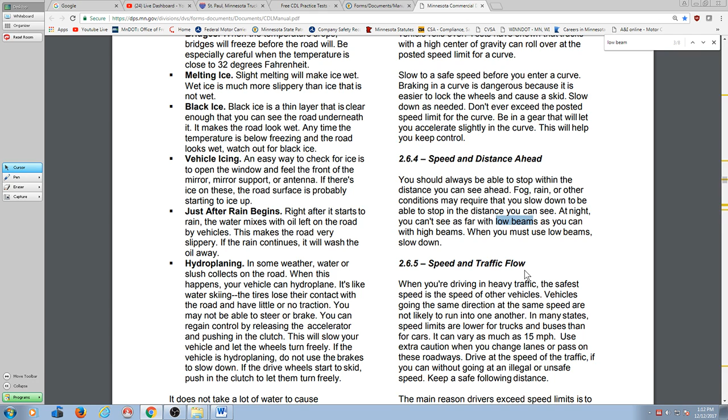So let's type in low beam. What it's going to do is take me to every place in the manual, and apparently there are 8 places in the manual that low beam is mentioned. Now, it doesn't take me to the word low or the word beam, it takes me only to low beam. So I like that, because typical search engines, you type a phrase in and it'll take you to every variation of it. So I really like the way they've got this structured.

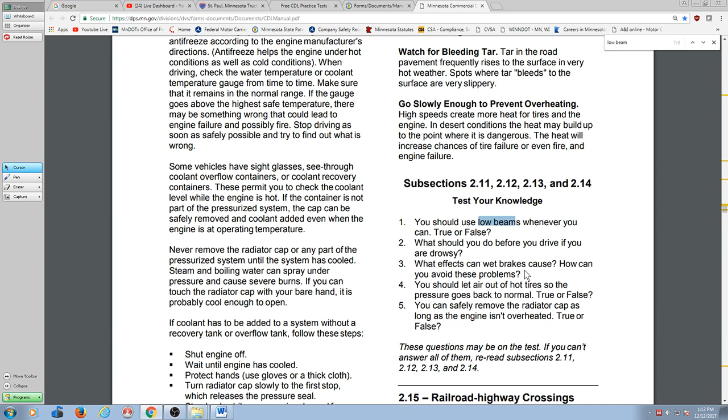This is very helpful to me to be able to answer or find information in here. I can't tell you how many times I'll have read something and think, wait a minute, what was that? I just read that a few minutes ago. Where is it? Now I'm searching trying to figure out where this thing I'm looking for is, and this just helps me find things so quickly. So I really like that. Go to section.

You have to spell properly, though, when you do this. That's the only kicker of it. Come on, you can do it.

All right, so now something else I want to show you. If we go back to my handout here, item number 6, the manual is also available as an audio file. Let's go back to the website. Instead of clicking on the manual itself, if I scroll down, you'll see the commercial manual, the regular car manual, and the motorcycle manual also have it available as an audio file. Now, on the screen here, I've got section 10, so let me click on that and watch and listen here for a minute.

Material on page 10-1 omitted. Continuing with the text. Section 10, Pre-Trip Vehicle Inspection Test. This section covers internal inspection and external inspection. During the pre-trip inspection, you must show that the vehicle is safe to drive. You will have to walk around the vehicle and point to or touch each item and explain to the examiner what you are checking and why.

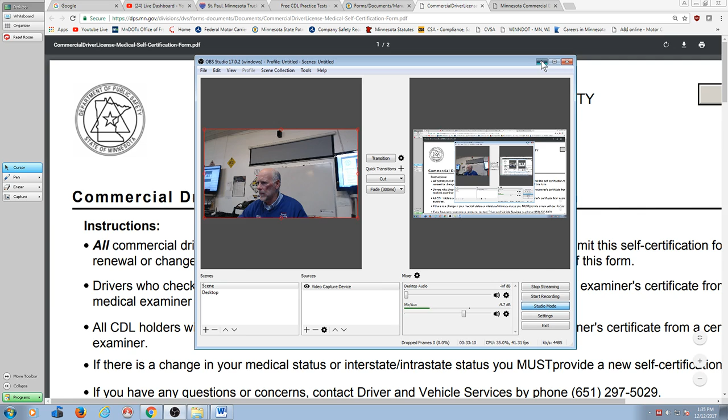All right, last sentence here. You need to complete a CDL medical self-certification form when you get your permit. This is real interesting. Flip to the last page in the handout I've given you. Let me get this on the screen for people watching via the internet. This is called a commercial driver's license medical self-certification form. You must fill out, sign, and submit this document when you get a permit. You'll have to do it again when you get your license.

Now there's 4 categories, and you have to pick one of those 4. Category 1 and 2 are for driving interstate, when you're driving within the definition of interstate commerce. Category 3 and 4 are intrastate commerce. First off, interstate commerce is a huge, broad definition. As an example, Midwest Fence, my landlord here, if they put chain link fence on one of their 1-ton trucks and drive over to West St. Paul to install it, that's interstate commerce. Why? That chain link fence came from Ohio, and all they're doing is continuing its trip. Even though Midwest Fence isn't leaving the state of Minnesota, they're still involved in interstate commerce. So if what you've got on your vehicle either came from or is going to another state, it is interstate commerce.

Intrastate means staying within the state itself. That's a very narrow definition, but an example would be hauling gravel. You dug it up out of the ground here in Minnesota and dropped it on the ground here in Minnesota, then you're intrastate commerce. It's even hard to argue with garbage disposal, because the garbage might be going someplace else.

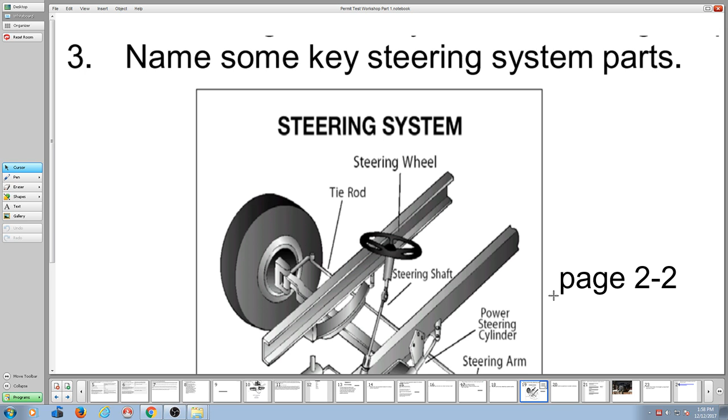So here's these questions that we just did. Most important reason for doing a vehicle inspection: safety. So what I did is I copied and pasted these answers in. What things do you check during a trip? Gauges, use your senses. Name some key steering system parts: there's a diagram on page 2.2 that shows you that - steering wheel, tie rod, steering shaft, steering cylinder, steering arm, spindle, steering knuckle drag link, pitman arm, gearbox, hydraulic fluid reservoir.

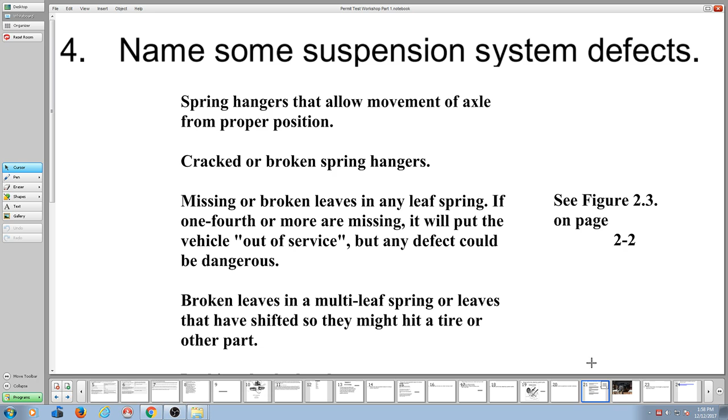Name some suspension system defects. Well, that's what was on page 2.2 that I read a second ago.

What 3 types of emergency equipment must you have? Any ideas what 3 types of emergency equipment we have to have? Flares, I don't know. Well, first off, fire extinguisher. Well, yeah, fire extinguisher, okay. Fire extinguishers have to be properly rated, fully charged, and secured.

Now, the proper rating for a fire extinguisher has to be a 5 BC. This is a 10, so this is twice what you need. This is actually what you need in a hazmat vehicle. So a B rating is to fight flammable liquids, C is to fight electrical fires. You need a BC, a 5-pounder.

Has to be fully charged, they're all going to have a gauge, needle has to be in the green. You don't need a tag - fire extinguishers in buildings need tags, but fire extinguishers in vehicles do not. And then properly secured. I learned that the hard way with a fire extinguisher I had underneath the seat of my pickup truck a while ago. Got out of my car in the garage at home and went, who barfed on my shoe?

My fire extinguisher barfed on my shoe. That's what happened.

Reflective triangles are required, and then spare fuses are required. Those are the 3 pieces of emergency equipment that you have to have with you.

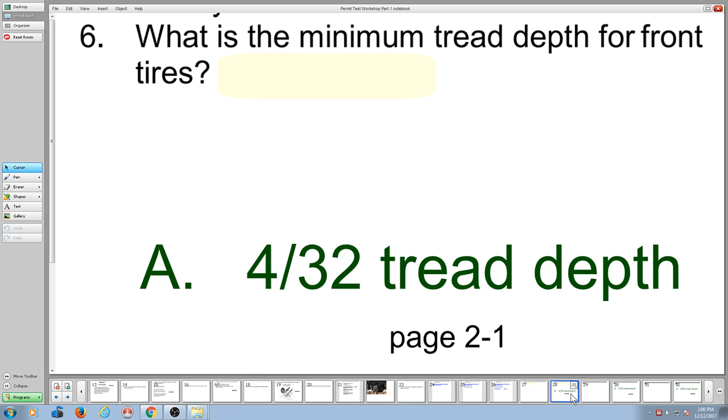Now, what did that page say about minimum tread depth? 4 32nds for the front tires. How about rear tires? 2 32nds. And what about trailer tires? 2 32nds also. The tire industry measures tread depth in 32nds of an inch, so that's how you measure it.

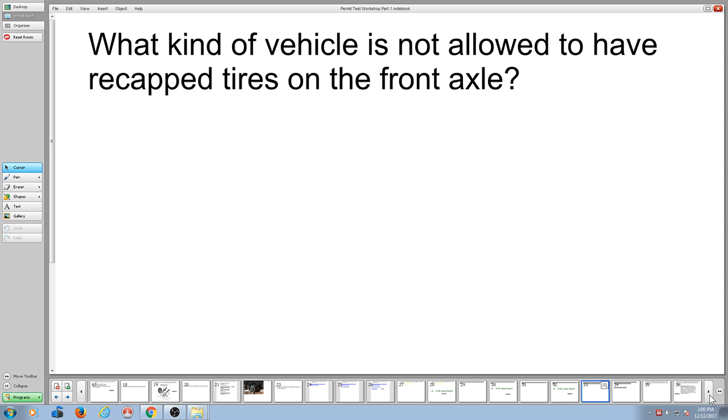Bonus question: what kind of vehicle is not allowed to have recap tires on the front axle? Any idea? Buses. Passenger buses are not allowed to have a recap on the front. Now, us truck drivers don't put them on the front either because it's not the safest thing to do, but it is allowed.

Name some things you should check on the front of your vehicle during a walk-around inspection. That's a very broad, open-ended question, but here's the correct answer: look underneath the vehicle for fresh oil, coolant, grease, or fuel leaks.

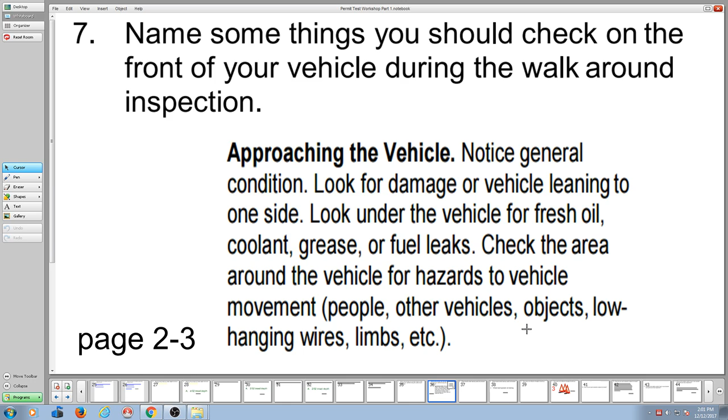What should wheel bearing seals be checked for? Leaking grease. How many triangles are you required to have? 3 of them, yes, okay.

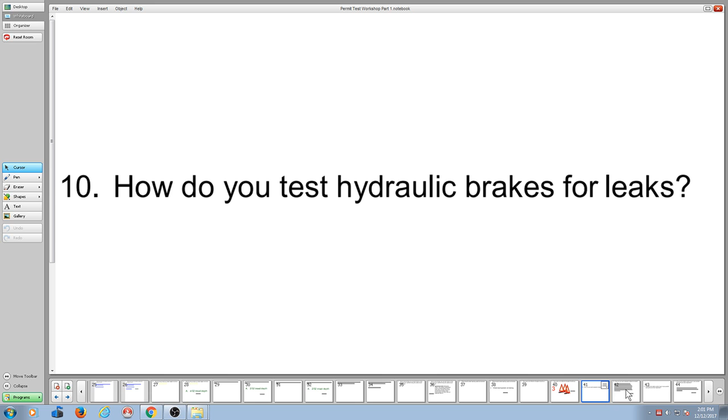How do you test hydraulic brakes for leaks? Any ideas? Pump the brake pedal 3 times, and then hold the brake pedal for 5 seconds. You should not lose any pressure. Make sense? So push on the brake pedal 3 times, then hold for 5 seconds. The pedal should not move during that 5 seconds.

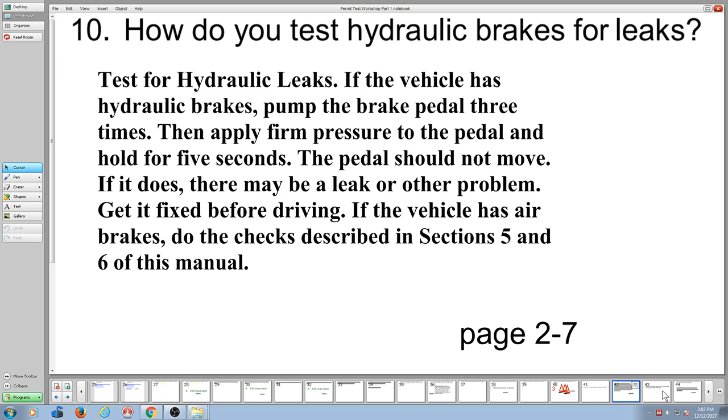Why put the starter switch key in your pocket during the pre-trip inspection? Well, so nobody drives off on you while you're underneath the vehicle. That's why. So that was the first 11 questions in the test your knowledge boxes.

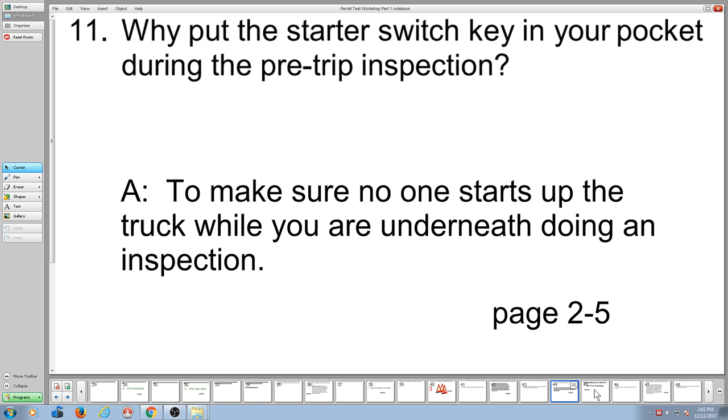The next section is on page 9 of section 2. First question is there: why should you back towards the driver's side? So you can see better.

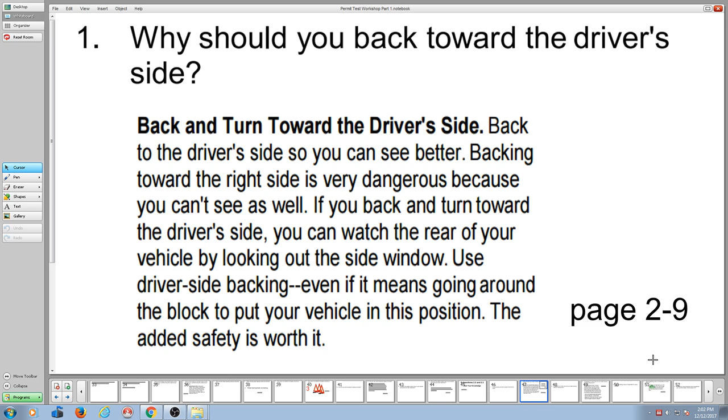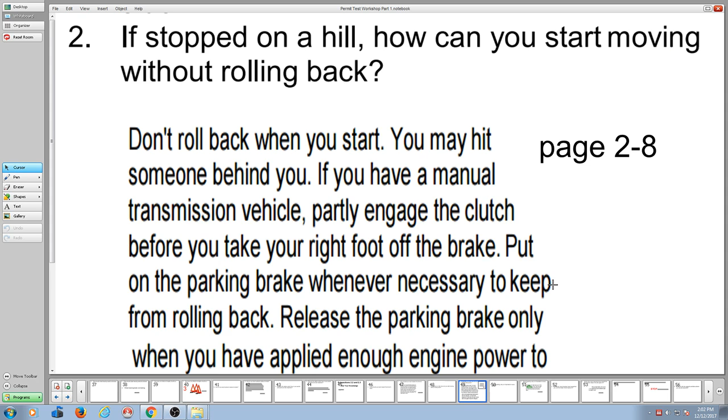If stopped on a hill, how can you start moving without rolling back? Well, with today's trucks, this really isn't a problem, but what the manual says is use your parking brake, or if you're driving a tractor trailer equipped with a trailer brake hand valve, use that. I don't do either one of these things. These trucks today with these diesel motors have so much torque to them.

This is not a problem of any kind whatsoever. With a manual transmission, your foot on the brake pedal, just put the clutch in, put it in first gear. Let the clutch out a little bit so you feel it start to engage, and take your foot off the brake. Let the clutch out nice and smooth, off you'll go. This is not a 1972 Pinto that's going to buck, snort, and stall and die on you, okay? So don't worry about it.

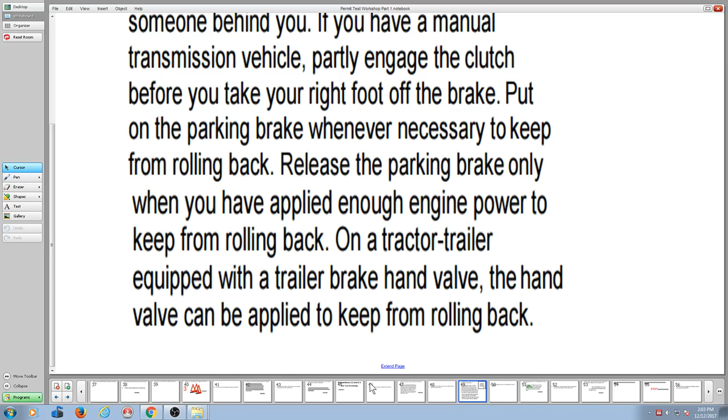What's the most important hand signal that you and the helper should agree on? Stop, okay? Then here's a bonus question: what do you do if you lose sight of your helper? Stop. Get out and look and find your helper, okay? If you lose sight of somebody that's assisting you, get out and look.

What are 2 special conditions where you should downshift? Prior to going down a hill and prior to going around a curve.

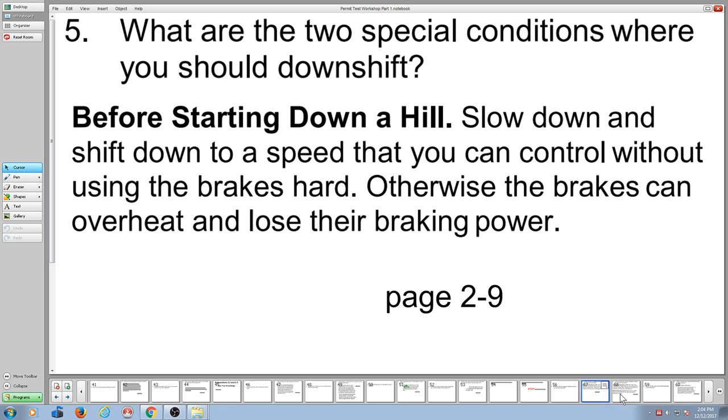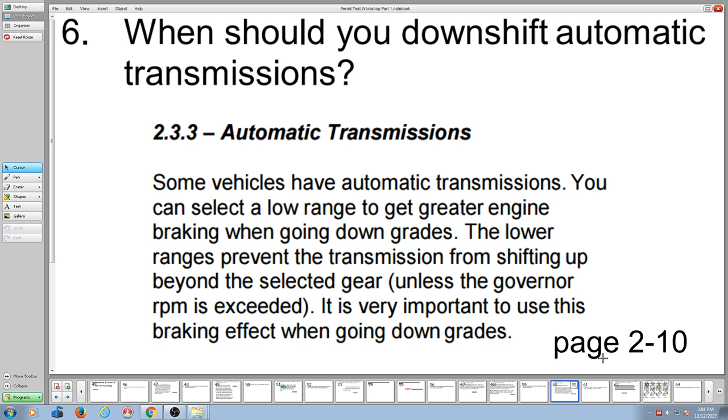When should you downshift automatic transmissions? Well, the manual says before you start down a hill. Here, the manual is so much old school stuff. There are so many things that have changed since this manual was first written. With today's automatic transmissions, they're programmed to do that automatically.

I have a little diesel in my pickup truck. I don't downshift that thing. It downshifts it by itself when I go down a hill. I'm going down a steep hill and the transmission starts downshifting all by itself. Same thing with the big trucks, right? But that's the correct answer: before you start down the hill.

Next question: retarders keep you from skidding when the road is slippery. Is that true or false? Well, first of all, what is a retarder? A retarder is an engine brake. So if I say engine brake, Jake brake, or engine retarder, that's all the same thing.

Let's look at what an engine retarder is by finding it in the manual and seeing what they say.

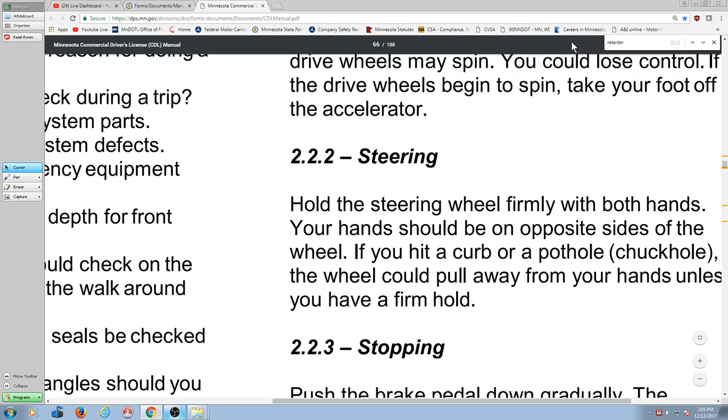Retarders. Some vehicles, not all, but some vehicles have retarders. Retarders help slow a vehicle, reducing the need for using your brakes.

The next sentence is kind of stupid because they're all exhaust engine related, and some are hydraulic, and all of them have an electric component to it. So that's a stupid statement. But the next sentence is true: all retarders can be turned on or off by the driver.

On some vehicles, the retarding power can be adjusted. They'll have a low, medium, and high, some a low and high. When turned on, retarders apply their braking power to the drive wheels only whenever you let up off the accelerator pedal all the way.

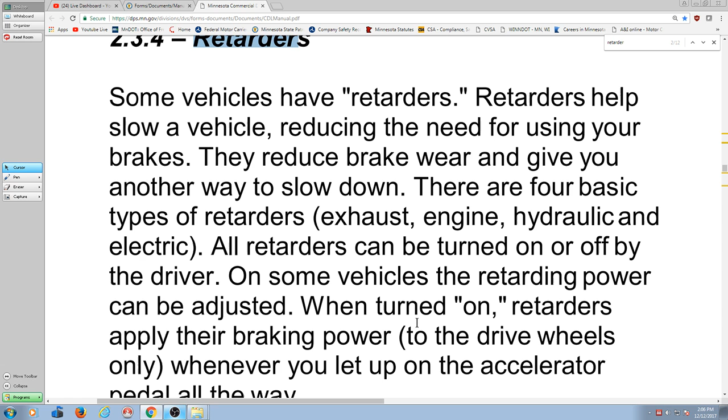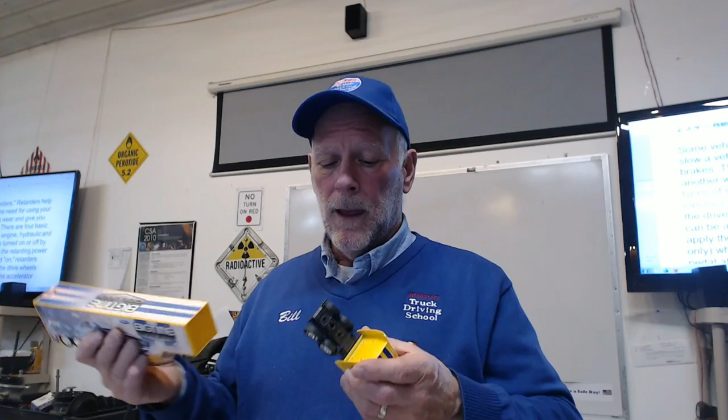So what's going on here is that we have an engine brake in here. There's a system that applies a braking force to the drive tires. Why is this an important component? The reason is these trucks, 99% of these big trucks on the road still have drum brakes.

Now, Jim, you're not old enough, you started driving something with drum brakes, right? You sure haven't. You've probably never driven a vehicle with drum brakes in your life. All right? Drum brakes are not as reliable and they're not as safe. And that's why we need these engine brakes.

Because when you're going down a steep grade, if you rely strictly on these drum brakes, what can happen? They overheat, fade, and they stop working.

Now, disc brakes are far superior, and disc brakes have been around in the trucking industry for, I'll bet you, at least 12 years, if not longer. But the industry has not adopted them. The industry has not gone out and ordered trucks and trailers with disc brakes. You can get them on trucks, you can get them on trailers. But for whatever reason, this industry just does not embrace this new technology.

It's stupid, but it is what it is. So that's why we're using engine brakes. Now, anytime you go down a steep grade that would cause the vehicle to increase speed, the engine brake is your first source of keeping speed in check or reducing speed. So you always downshift at the top and use your engine brake going down any grade.

Now, if with the downshift and with the engine brake, the speed rises, there is a formula for how you're supposed to use the brake pedal on a grade. Anybody know what the formula is? Use the brake pedal. Here's what you do. You start down the hill 5 miles an hour slower than what your target speed is.

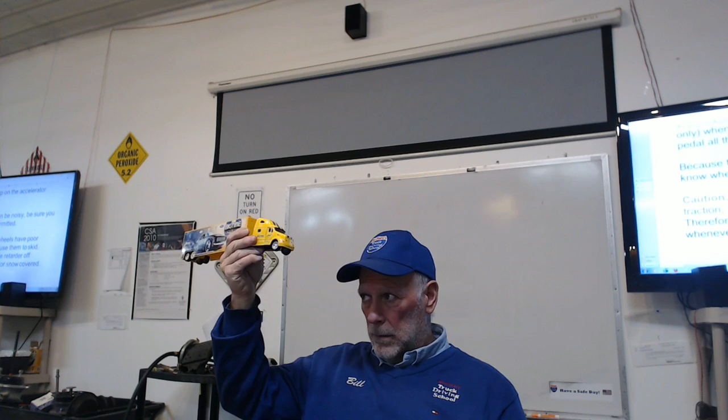I don't understand drivers that keep pushing through these precarious conditions. If the roads are slippery enough that people are going to spin out and lose control, why would you keep driving? Now, you might say to yourself, well, I'm under control. Fine. But Aunt Bertha that we were just talking about, is she going to stay under control? The 16-year-old kid that just started driving, is he going to stay under control? And so now the road's blocked, and you're a truck driver. What have you done for yourself? What have you accomplished? Because now you're sitting, stopped in the middle of a road because other people have spun out.

You're Minnesotans. You see this constantly, right?

Now, the Federal Motor Carrier Safety Regulations specifically say that during adverse conditions caused by a variety of things—ice, snow, sleet, any of that—when it adversely affects driving conditions, you're supposed to slow down, and if necessary, the rules say you should stop. You should get off the road and stop. It says it right in the Federal Motor Carrier Safety Regulations. And the feds also give us guidance on these regulations, and the guidance on that rule specifically says the decision to determine whether you continue or stop is the driver's, not management's. It is not your supervisor's decision. It is your decision by rule.

Couple that with the Federal Whistleblower Protection Law, which says that if any employer retaliates against you for complying with the federal rules, you've got the basis for a federal whistleblower lawsuit. And there's been a ton of those won by drivers over the years.

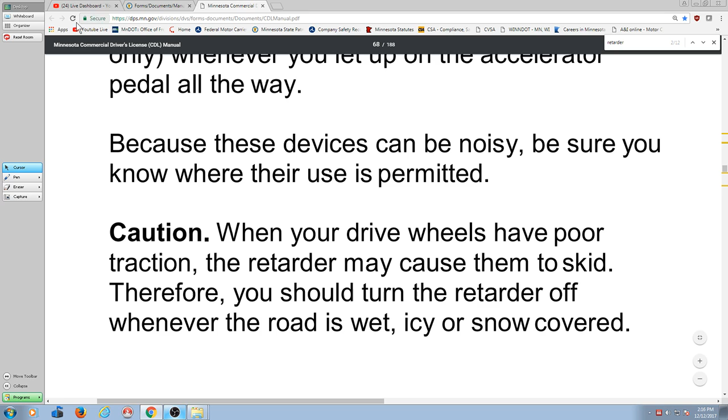All right, we got time for a couple more of these test questions here. What are the two ways to know when to shift? Well, according to the manual, engine speed and road speed.

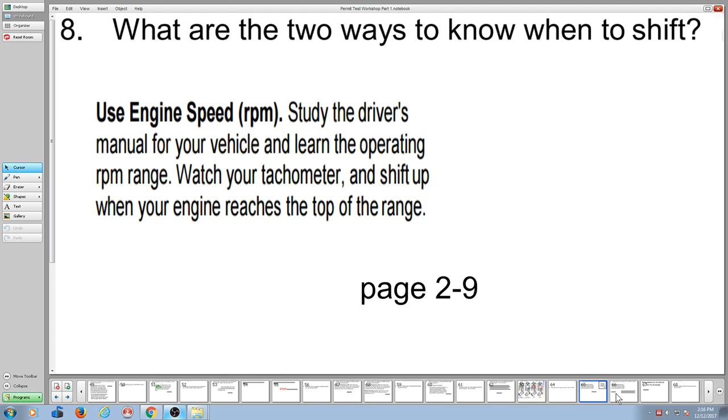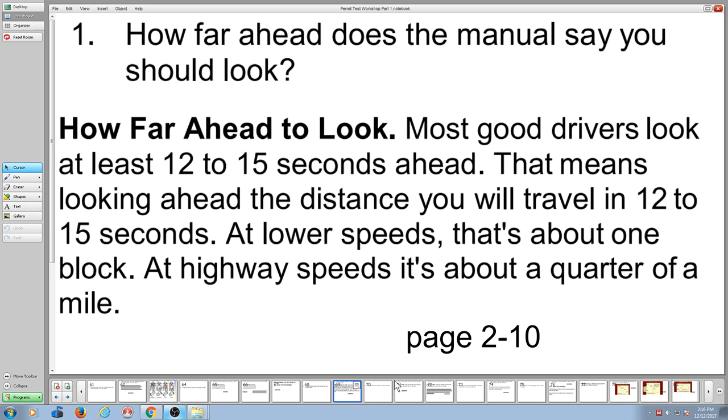I don't care how far you would look. I don't care what you would do. That's what the manual says you do. That's what you say on the test. What are the two main things to look for ahead? Two? Come on, two? But according to them, traffic and signs or signals. You know, I might add in hills and curves and bridges and a whole bunch of other things, but nope, traffic and signs and signals.

And it's actually three things. Okay, what's the most important way to see the sides and rear? Mirrors. What does communicating mean? Signaling.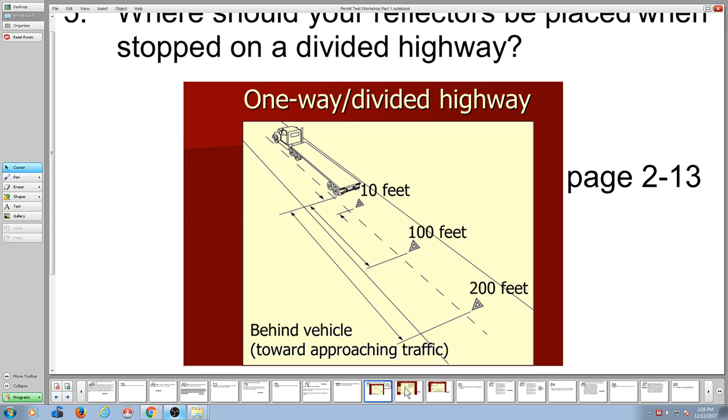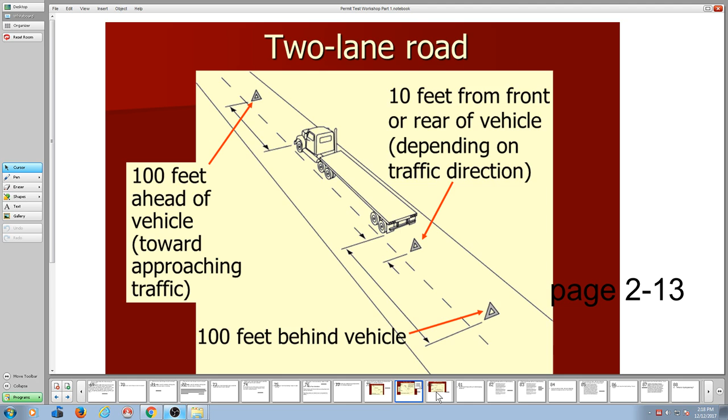All right, how about this? The reflective triangles we mentioned a minute ago. If you stop on a divided highway, where are your three reflective triangles supposed to be placed? I just remember 10, 100, and 200. 10, 100, and 200 behind you. What if it's a two-lane road? 10 feet in front, 100 feet in front, 10 behind, and another 100 behind. What if there's a curve or hill? Up to 500 feet. All right.

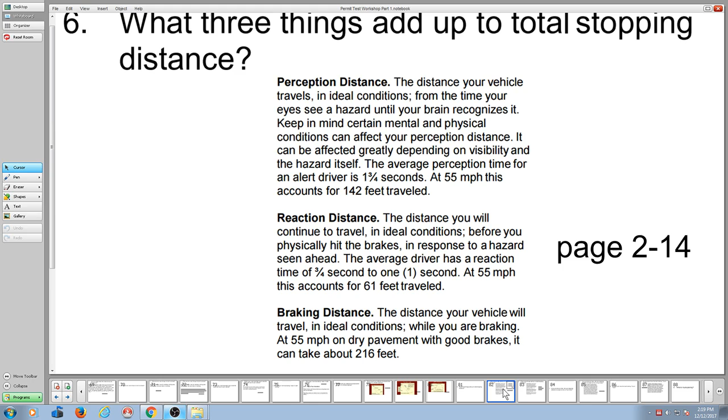What three things add up to total stopping distance? Perception distance, reaction distance, and braking distance. Now, if you've read the section on air brakes, you will have read about something called brake lag. And that's not what they're asking with this question. They're asking for three. So if they're asking for three, these are the three. Brake lag would be a fourth. So if the question asks for three, there's the correct answer. Forget brake lag unless you're asked for four issues that add up to total stopping distance.

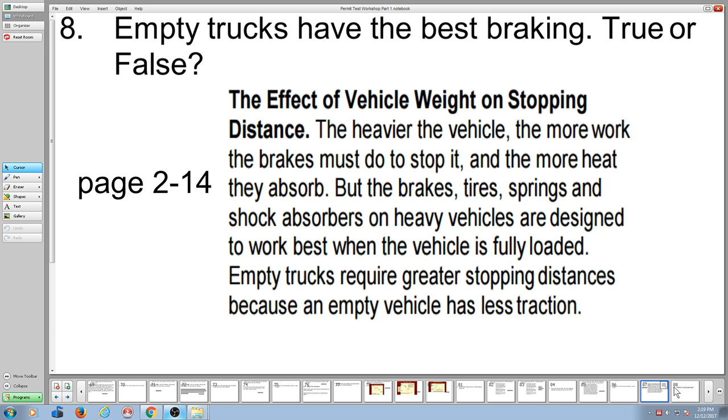If you go twice as fast, will your stopping distance increase by 2 or 4 times? 4 times. Empty trucks have the best braking. Is that true or false? That's false. As I mentioned to you a minute ago, when we're bobtailing, that's what we call it when there's no trailer, you have very, very little traction. You got to be very careful when you're running around empty like that. A heavily loaded truck will plow through snowbanks, and an empty truck will get stuck on level ground. It's just a night and day difference.

What is hydroplaning? Well, you're all Minnesotans, you know what that is. And then what's black ice? You all know what that is too, right? All right, okay, so let's do this, let's go. Yes, question, are these multiple choice tests? Multiple guess or true false. All right.

Let's go to our website and go to resources, and we're going to take this practice permit test. Now, how many questions did I tell you a Class A would be? 100 questions. If we go to the Class A Part 1 on cdltest.co, it is a 100 question quiz. So that's good. Question number 1.

What should you do before you drive if you are drowsy? Get some sleep, figure that one out. Excuse me. All right, we had this question right from the get-go: what's the most important reason for doing a pre-trip inspection? Safety.

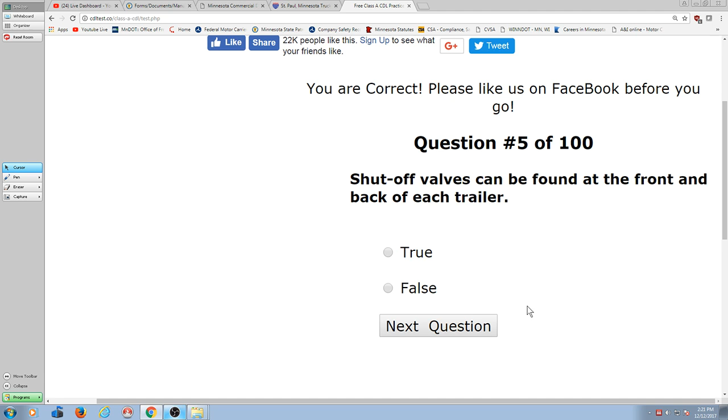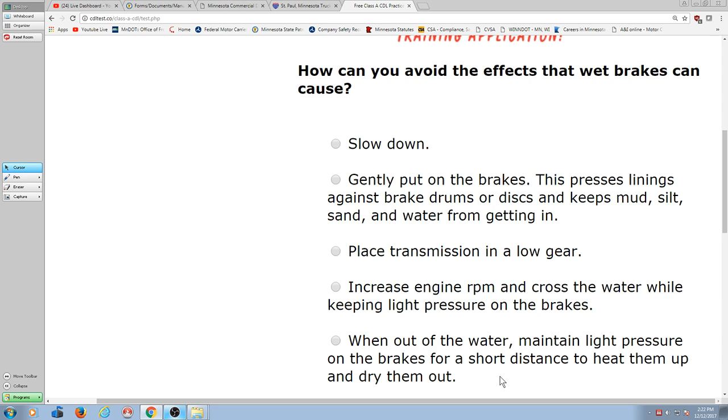How do you avoid the effects that wet brakes can cause? This goes back to the drum brakes. Wet brakes, the moisture does not affect disc brakes much at all, but it definitely affects drum brakes. So how can you avoid the effects that wet brakes can cause? Well, slowing down would help you. Gently putting on the brakes presses linings against the brake drums or discs, keeping mud, silt, sand, and water from getting in. That could help, yeah. Transmission low gear, well, that's slowing down, same thing as number one. I suppose that'll help too. Increase engine RPM and cross the water while keeping light pressure on the brake pedal, that's actually a good idea. When out of the water, maintain light pressure on the brakes for a short distance to heat them up and dry them out, that's the best idea yet. So I'm going to say all of the above.

And that's correct. Now if you have a question and you're not sure, you could use the question itself to learn the correct answer. So if I use the first one, it tells me, nope, wrong answer. I can then go back and choose something else and try that. Still wrong answer, I can go back and try something else. So this is another way you could study. I'd suggest reading the manual as a better way to do it, but you can go back and forth with your questions to find the correct answer.

We had this one, didn't we? Retarders keep you from skidding when the road is slippery, true or false? False, they actually cause skidding. They don't keep you from skidding.

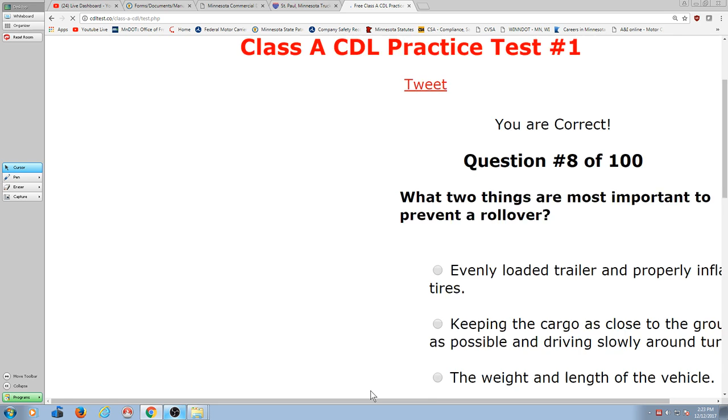What two things are most important to prevent a rollover? Evenly loaded trailer, properly inflated tires, well that's important, but is it the most important thing? Second one, keeping the cargo as close to the ground as possible and driving slowly around turns, well that's pretty darn important. Weight and length of the vehicle factors into it, but it's not the most important. Keeping the cargo's center of gravity as high as possible, now that's for sure wrong. So I wouldn't say it's none of the above. I'd say the best one is keeping the cargo as close to the ground as possible, and that's the correct answer.

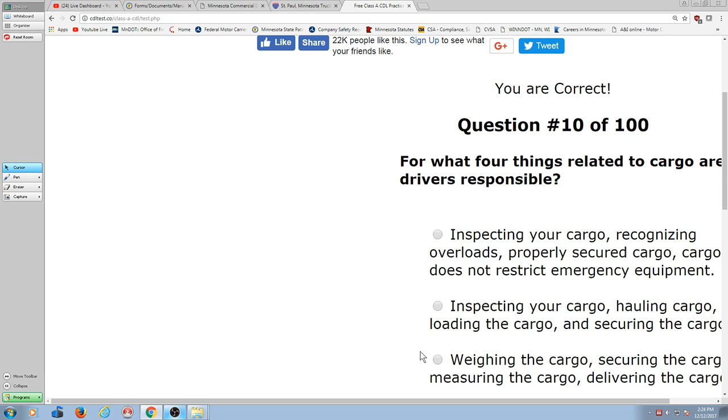We had this question, didn't we? Yeah, so what's the answer? 4, 4 times. What 4 things related to cargo are drivers responsible for? I'd say it's the first one: inspecting the cargo, recognizing overloads, properly securing the cargo, and making sure the cargo does not restrict emergency equipment. I'm going to go with that one.

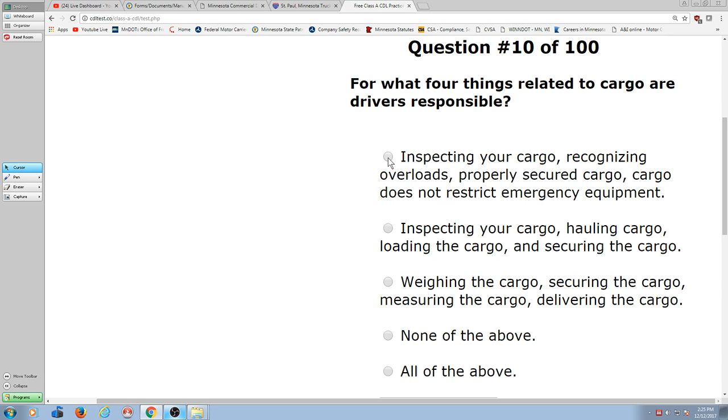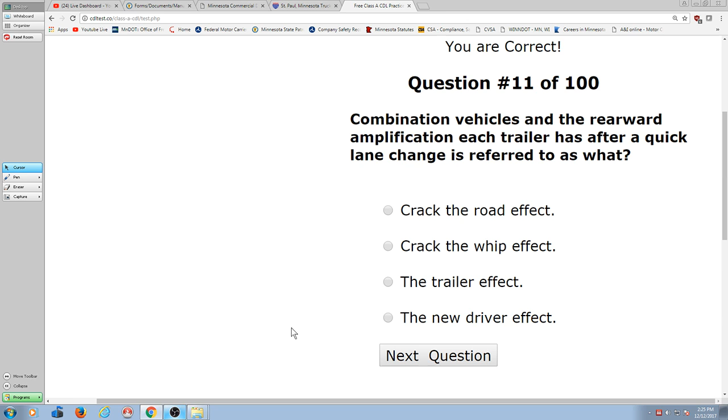Combination vehicles and the rearward amplification each trailer has after a quick lane change is referred to as what? They call it the crack the whip effect. Okay.

The braking effect of an engine on a long, steep downgrade should be used to supplement the use of the brakes, true or false? What was I telling you about the engine when you're going down a hill? Well, the new ones kind of slow themselves down. Okay, but what do you do first, the brakes or the downshift? Use your engine brakes. So this question says the braking effect of the engine on a long steep downgrade should only be used as a supplement to use of the brakes, true or false? False. It's the other way around. That should be the primary thing that you do, downshift and engine brake.

Letting up on the brake pedal increases air pressure and releases the brakes. Well, letting up on the brake pedal releases the brakes, but it doesn't increase air pressure. That's a trick question, okay? I don't like that one, because half of it's true, but half of it's false, so gotta go with false.

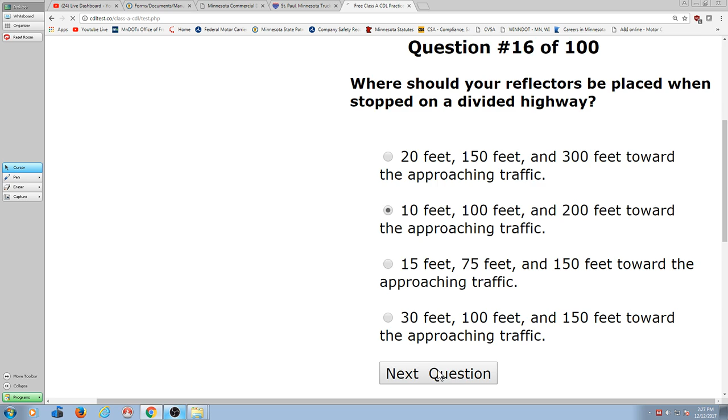What would happen if the trailer is too high when you try to couple? It may not couple correctly, the kingpin may fall off, the trailer may tip over, all the above. Kingpin's not going to fall off and it's not going to tip over. Okay.

Combination vehicles are usually lighter, shorter, and require less driving skill than single commercial motor vehicles. False. Just got to read the question.

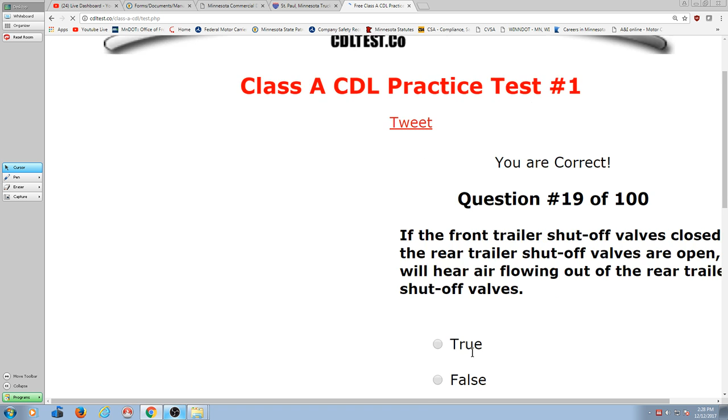If the front trailer shutoff valves are closed, and the rear trailer shutoff valves are open, you will hear air flowing out of the rear trailer shutoff valves. No, you won't, because the front one's closed. So how would you hear air flowing if the front one is closed?

What's a pull-up? Pulling forward while backing a trailer to reposition it is the correct answer. See, they want me to sign up again. Don't do it.

All vehicles with air brakes must have a low air pressure warning signal. That is true.

Here's a question that I got wrong the first time I took it because I didn't think it all the way through. You should use low beams whenever you can. True or false? That's false. You should use high beams whenever you can. Now, you use low beams 99% of the time, but if there's nobody coming the other way, you should use the high beams. I got that one wrong the first time I took it because I just kind of jumped to a conclusion.

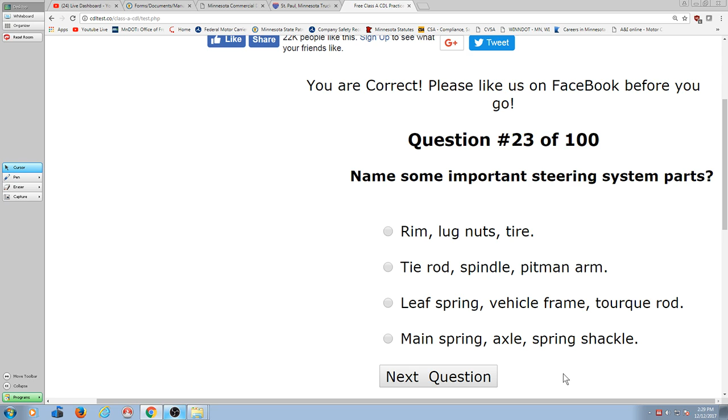All right, one last question. Name some important steering system parts. Which one? B, the second one. Tie rod, spindle, and pitman arm. You've got to be able to recognize that stuff based on the manual, right?